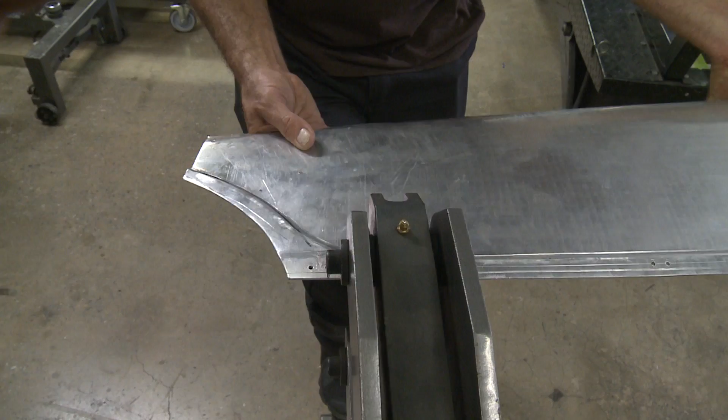Our latest project is a 2029 Majestic motorcycle. It's basically a 100-year version of the 1929 Majestic, which was a really beautiful French creation. So instead of a 1929, we do a 2029 futuristic Majestic. Bobby Haas, a collector out of Dallas, loved the idea, and so here we are.

We know we are doing something that's never been done before. There is no actual blueprint. We're not doing a production cycle. We're doing a piece of work that is rolling art.

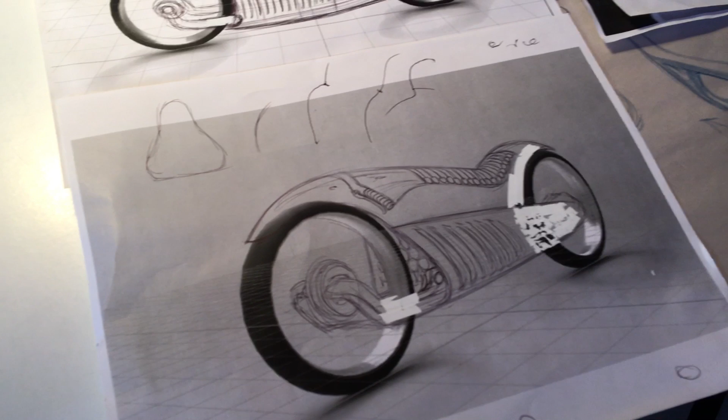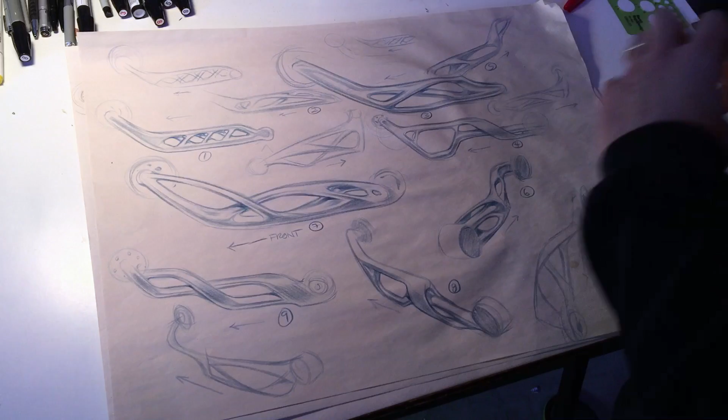It is unique. Once we knew we were going with this future kind of plan, I brought in Nick Pugh. He's worked on Star Wars. He's also a transportation designer and a futurist. He took our kind of pencil sketches and turned them into actual 3D models that were made into the parts.

As a place to start, I would often do very rough, loose kind of sketches like this. Here's some of the designs of the front suspension arm, the very first phase of it.

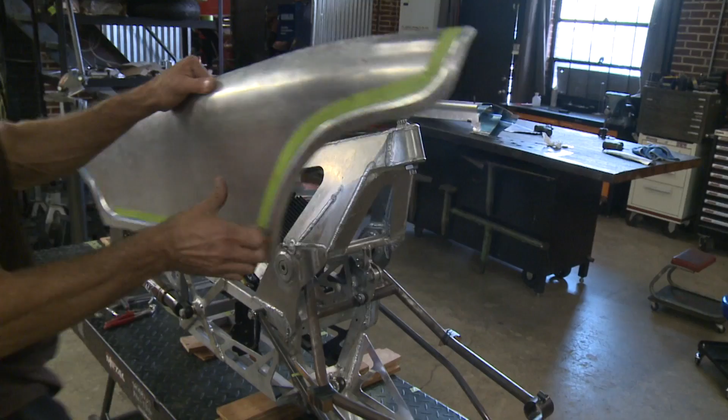So we started with a Zero electric motorcycle. They're out of California, and they built a really cool piece - this is their original frame. It's made out of aluminum, nice and light. It's still going to be a motorcycle, just nothing conventional about it.

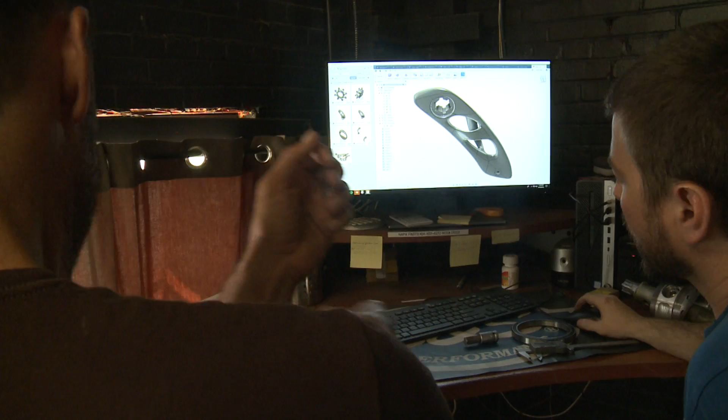We wanted to 3D print a lot of the mechanical parts, because now you can 3D print metal. This was a CNC part - 10 years ago we thought that was the most incredible thing ever. A CNC machine, winning! Now we just go, boop - oh, could you print that, please?

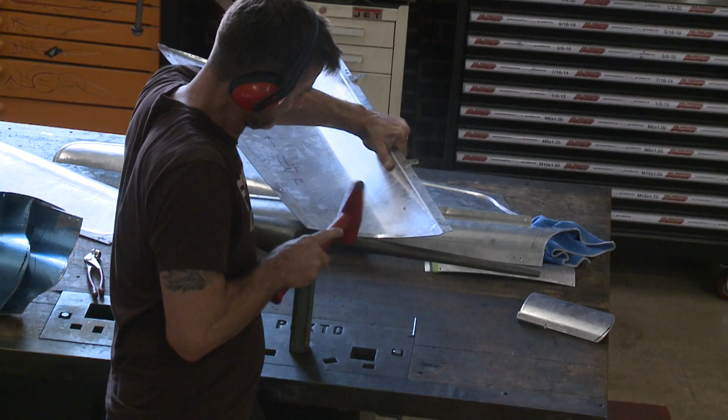But at the same time, we are an old school hot rod shop, and we're going to be building some of this stuff with old world technology. We've got an electric bike - it's got a body on top of it instead of just a frame and a tank.

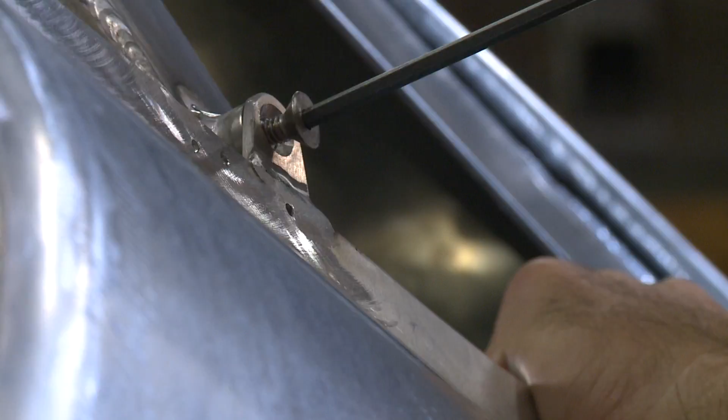They have diffusers in the back, so the air comes in, and as it comes out the back, you're trying to streamline it. Plus, they have a really cool look.

It's got hub-centric steering - this axle goes in and pivots on these bearings. There's no traditional fork; it has a hub that it spins on, almost like a car does. And we wanted to do plexiglass wheels, because in the future you could have a material that was strong and also clear. So this will all be clear polycarbonate.

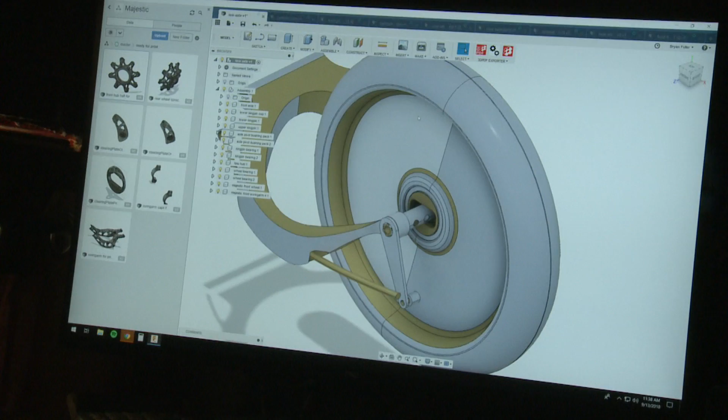I'm doing the engineering of it and getting the initial CAD model done, then sending it off to a designer who does all the sculpting of the 3D model. So this was what I gave Nick, just basic pickup points, holes, and everything for the dimensions.

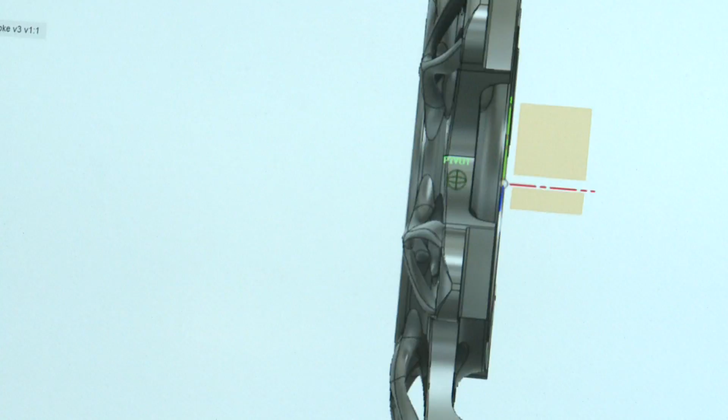Then he does this kind of stuff with it, growing out different organic shapes. These were very complex, and these all have to be exactly left in the same place as the engineering model, and then you have to basically bridge these connecting points with all of the correct dimensions, using this more organic technique. You couldn't really make this part easily - there's all these pieces that fold in and out of themselves.

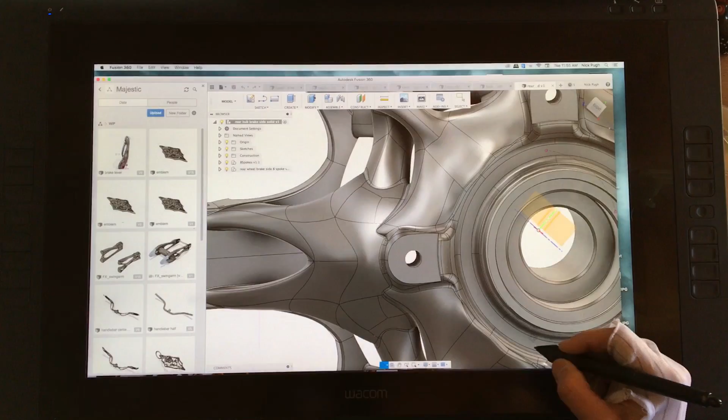And you see what he did here with the hub - I mean, this is incredible. So that will actually hold the plexiglass wheel.

We take each one of these models and we share them with Oerlikon in the printer, and then they print it out of titanium. Printed titanium - way of the future.

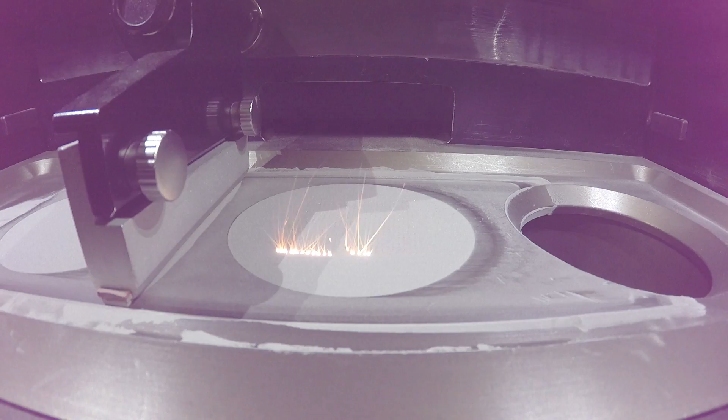There's a laser that basically, like TIG welding, lays down a really fine layer at a time, microns at a time. The laser is actually reflected around by a mirror - so the mirror is turning and pointing the laser where it wants. It swipes another thin layer of powder, which can be aluminum, magnesium, stainless steel, whatever, titanium, and laser again for like 2 days. Boom, there they are.

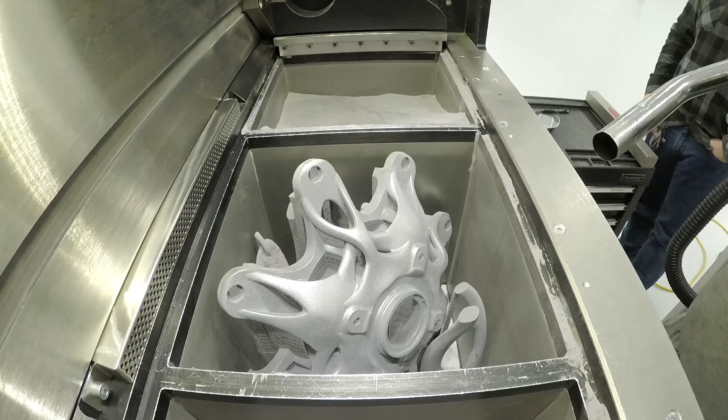I think the 3D printing aspect is something you got to really wrap your brain around, to figure out that you can do all these different things. It opens up a lot of possibilities for what you can create. It's just an amazing thing to be able to sit here and create an object like this in the computer and have it turned into something physical.

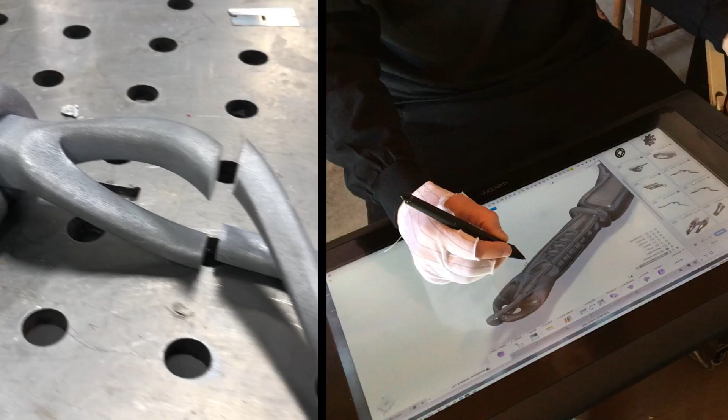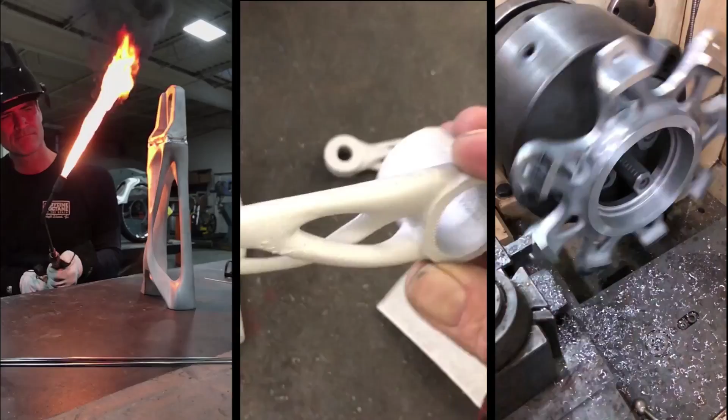It's pretty magical. The metal printing has been what's really changed things, because before we could only do plastic stuff and it would be brittle and fragile. But the new pieces we've been getting are rock solid, they're tough. Now that we can print metal, it is on - this is a game changer.